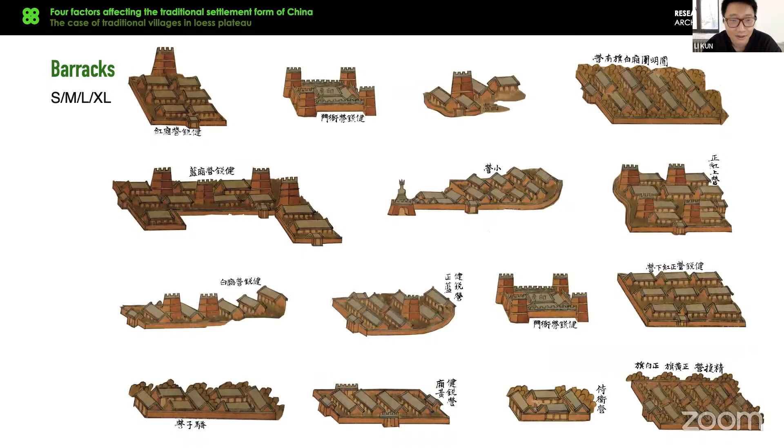And also the increase in scale is formed by the clustering of single buildings of the same size and courtyards of the same size. This is the villages - you can see one village, two villages, and also some big villages, and also some temples. So this painting reflects the Chinese understanding of architecture as a constant combination of types and archetypes, together with the barracks, offices and factories.

So if we see them together, we can see there are different functions. But just like Aldo Rossi said, when discussing the impressions of traditional Japanese architecture, which is also influenced by Chinese culture, it is difficult to tell the difference between the civil, the religious, and the community buildings of the past.

So when we link up the smallest functional buildings in that set of paintings, we see that they all look indistinguishable from each other - they look the same. It's a simplified version of what we can call the lower standard house, only missing two wing buildings in a standard courtyard. So all the different function buildings, they look the same.

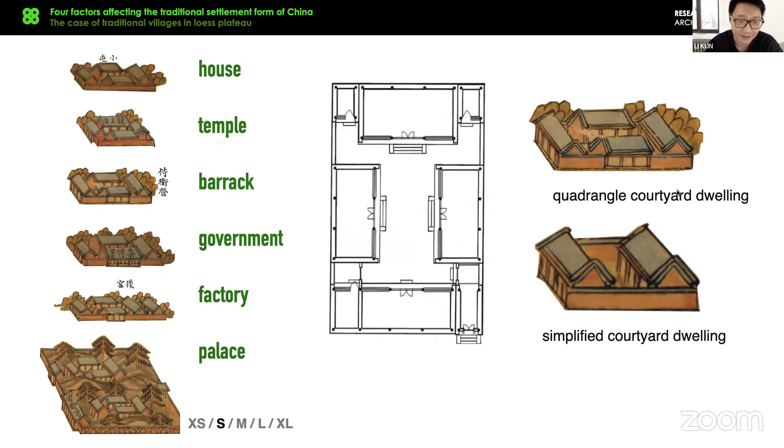And the layout is in the middle - they all look like a very standard design. So when many compounds of grouped courtyards gathered, settlements such as villages and cities were formed.

So going further, we can read how the ancient Chinese describe the city. As in European cities, the public and cultural buildings form critical infrastructure for the practice of the urban fabric and play a very important role in the urban form. When we see this Nolli map, there would be no urban order if the city consisted only of isolated buildings and monuments.

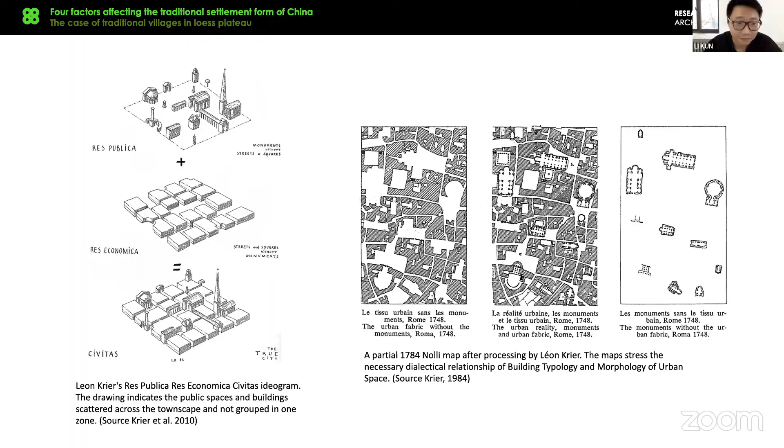This is why we focus our attention today on historical research and residential architecture study in China. The residential building and the organization of residential buildings is very important. In Chinese settlements, dwellings occupy a large amount of space, with similar dimensions, grouped together in very tight manners, with almost no gaps visible within the group. The result of their combination presents a very organic fabric.

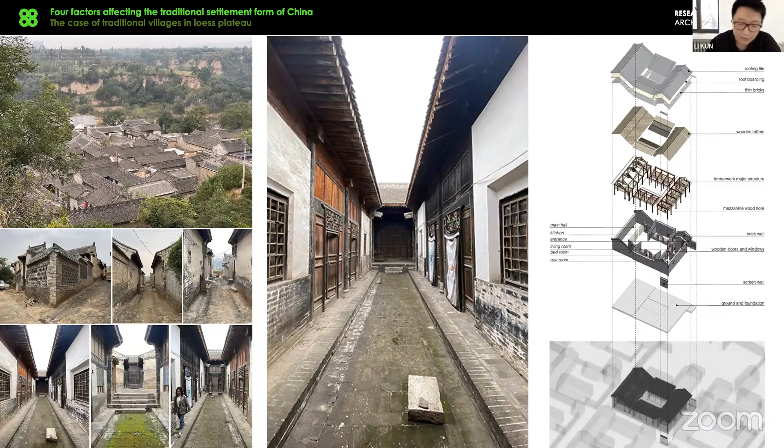This kind of single-story courtyard becomes a basic spatial pattern and ideal residential building form for much of the northern Chinese area during the traditional period. This is a very typical courtyard, in Chinese it's called yuan. The building in this image becomes the smallest unit in the traditional urban form and the smallest unit in the courtyard.

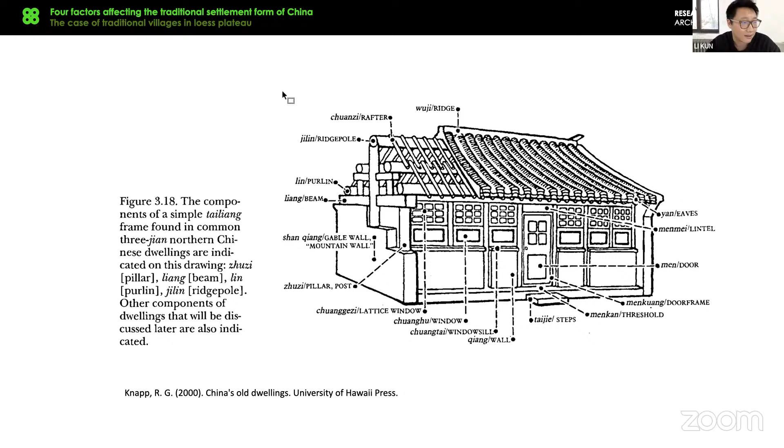It is realized through the timber self-supporting structure, where the walls themselves do not bear the weight of the roof. The main structure is these timbers, and the walls are only the enclosure. From this picture, we can see that the typical technical feature is that the structural beams and pillars are connected by mortise and tenon joints.

The scale of the building is also measured by the number of what we call room between two pillars. There is 1 room, 2 rooms, and 3 rooms. So 3 room or 1 room or 2 room is a measurement of the building in traditional China. We can also see there are some purlins on the roof, so 3 rooms and 5 purlins - this is how people describe this building.

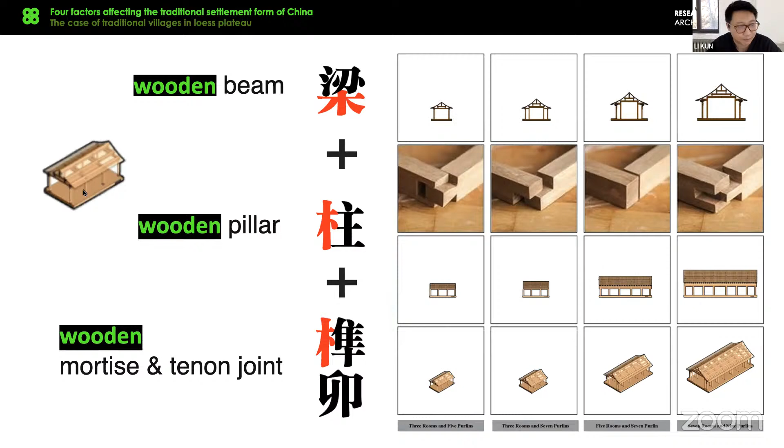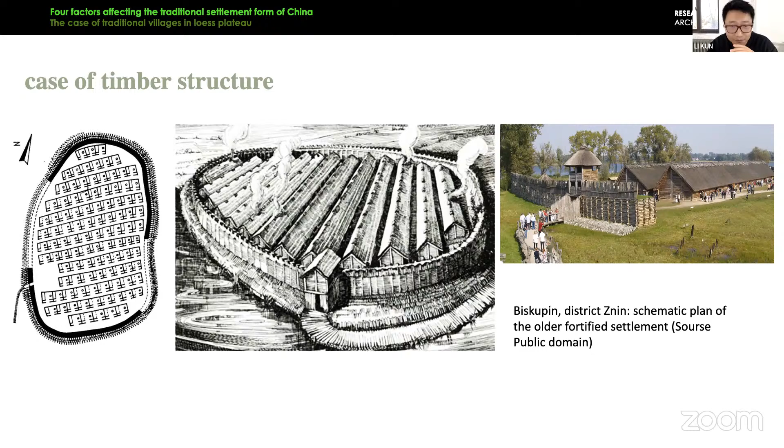Some questions are very easy to answer, because there are examples of wooden elements jointed by mortise and tenon elsewhere. For example, in the Iron Age settlements in Poland, in Biskupin and some other places, archaeologists have discovered a number of settlement ruins built of wood between, let's say, 760 BC. They were originally built in swamp environments, wetlands, and all the walls and buildings were constructed by timber. So the construction of houses with sloping roofs and such timber structures and materials were not only found in China, but also in Europe.

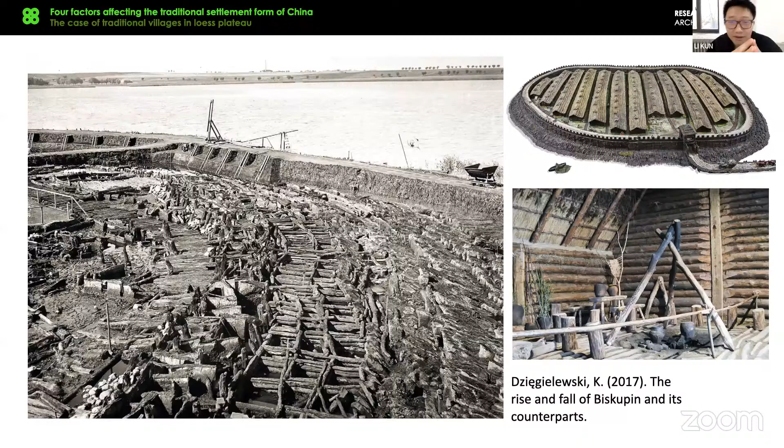There's another example that's easier to answer this question, in the Netherlands. The Netherlands is a country that has historically struggled with flood for a long time. As early as the 14th century, and even further back, most housing in the Netherlands was timber framed. This timber framed house can be defined as a self-supporting structure consisting of jointed frame members. It quite looks like the Chinese buildings, where even the wall does not support the roof. They have the self-supported timber structure system.

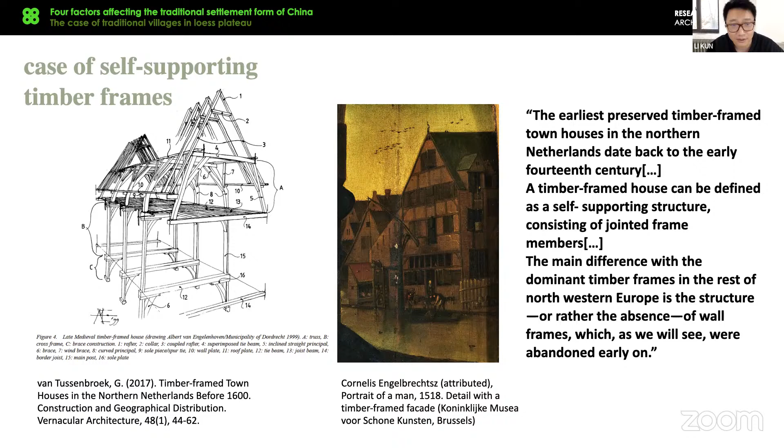So the wooden structure is not unique to China, and also the smaller dimension of the courtyards is not unique in China. There's a case of a house in Pompeii, Italy. Compared with this Silver Wedding house in Pompeii, you can see there's a typical courtyard in northern China which looks so much like it in scale. We found that the scale of their central courtyards are quite similar.

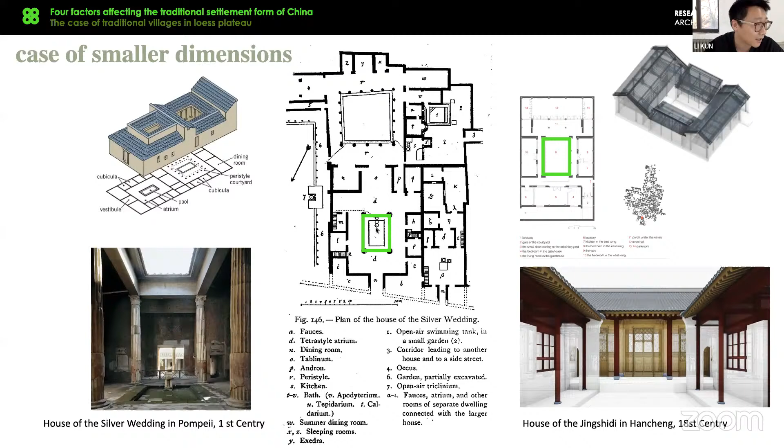In this part, the green one, because these two line up in the same scale. Also in China we have like two-connected and three-connected courtyards like this. So on this figure, it's easier to see the similarity in scale and form between these two types of courtyards between the west and east in the world.

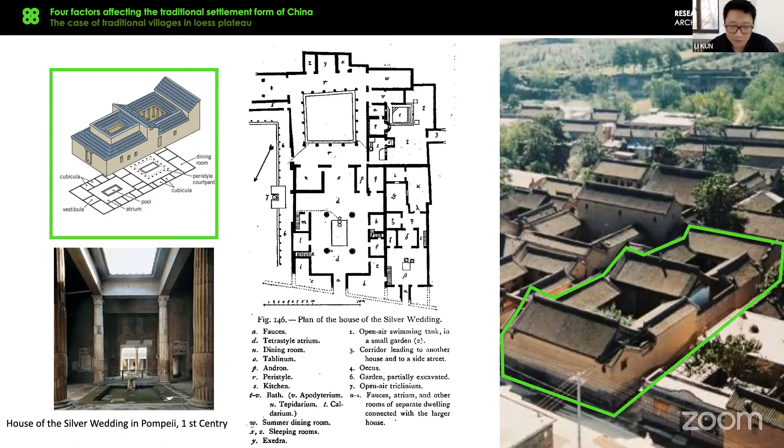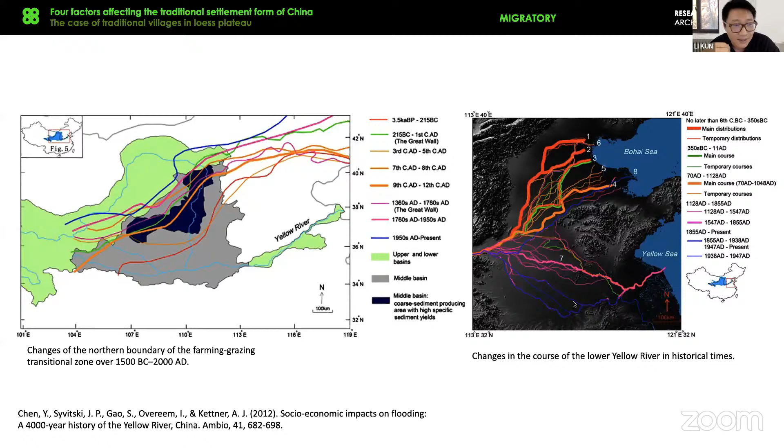And also in the past 3,500 years, the Yellow River changed its riverbed from the north to south and then went back to the north. So every 25 years, there's a very big change of the riverbed. And also, maybe every 2 years, there is very big flooding in the surrounding areas of the Yellow River Basin. So that is a very bad situation for the ancient Chinese people.

So that's why the very important American Chinese historian Ray Huang pointed out in a book named China, a Macro History, that floods and water flooding greatly influenced the formation and development of Chinese society. The Yellow River often has an unsettled riverbed, causing flooding and breaking of the embankment, and the possibility of massive loss of life and property of the ancient people. So how to face this flooding, how to face this situation, how to change the lifestyle is a very important question for the ancient Chinese people.

So also, if we look at some historical books in ancient China, you can see that there's one word. It said that in ancient times, the former kings did not have places permanently. In winter, they lived in souterrains. They lived maybe in a cave, underground or on the ground. And in summer, they lived in elevated places. Maybe they lived in some houses on the tree or in high places. So it means that in winter and in summer, they change their places to live.

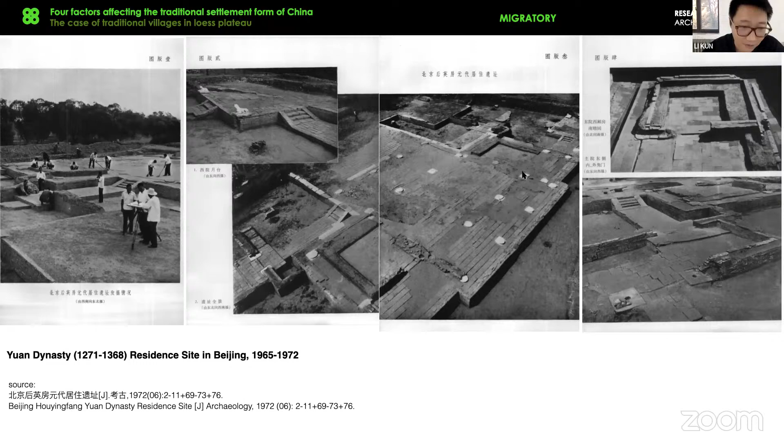So why did they disappear? Maybe one reason is that people demolished them and built some new buildings on the basement because the wood cannot last so much time. And also maybe when people moved to other places, they took these materials with them, these pillars, these big beams, the tiles, and maybe they transported them on the water, because the wood can float like a boat and move from one place to another very easily.

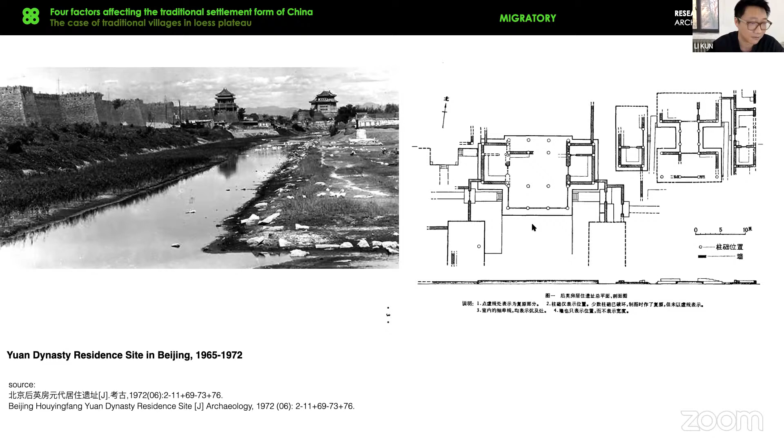So this is the layout of the courtyard basement in the Yuan Dynasty. We can see them like in a belt because this is the basement of the city wall. Okay, so this picture is a very interesting picture. I want to show the idea that when the flooding is coming, or when there are some very damaging changes of the environment, people can move their buildings: first make the buildings into small elements, and then take these small elements to another place.

And there's also an interesting thing: in ancient China, when we found some documents, we see that the yin and yang attributes of the residential building changed when they moved from one place to another. So this also tells us maybe in ancient times, migration was very, very common. It's a popular thing people did to face the situation, because when they move to another place, their nature is also changed. Okay.

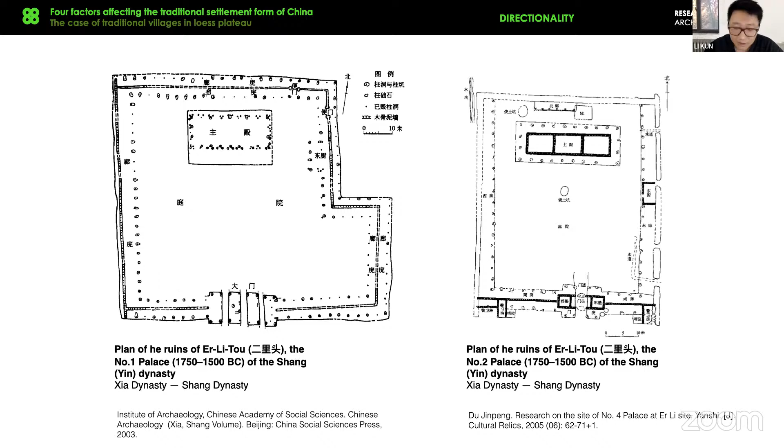So they have a strong feature that the courtyard faces the south. But for ordinary people, are their houses all facing the south? That is also a question. So also we can see the numbers of different orientations have some relationship with the height of the building.

For example, in this courtyard, the north building, whose roof height ends in the number 1 or 6. For example, this is 1.16 unit, and this is the number of the north.

It also works on the south building, the west building, and east building in the courtyard. So this is what I found in the investigation in the village, and people said this is their tradition. This is really a tradition. So this tradition formed the building form and the village morphology.

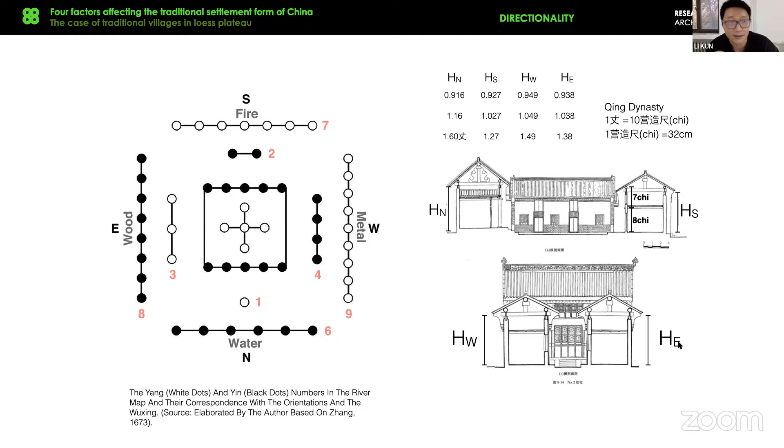Okay. So also there are two floors of this building, and the first floor and second floor, their height is different. The first floor has 8 units, and the second floor has 7 units. And this is also a tradition. So this 8 not only means a number, it also means the element of wood, and 7 means fire. And we know that in Chinese culture, the five elements have some relationship with each other. Sometimes they say fire grows from wood. So maybe there is some interesting connection with this kind of culture.

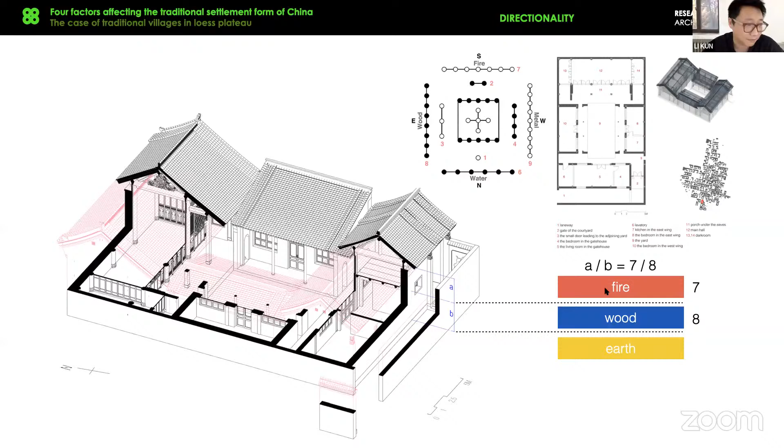So let's answer another question: in villages, do these courtyards all face to the south, like this conceptual layout? If like this, every family can face to the south. But the reality is that not all the courtyards face to the south. Some face to the north, some face to the east, some face to the west. And if we combine the areas with each other, we found that in this layout they save more land. They can save more cultivated land.

And in this way, the wind can go from one place to another and make a better environment for ventilation. And in this other way, the wind goes very fast, and maybe there's a shortcut for the wind, and the new air is quite hard to get inside the courtyards. So this is also a concern of the layout.

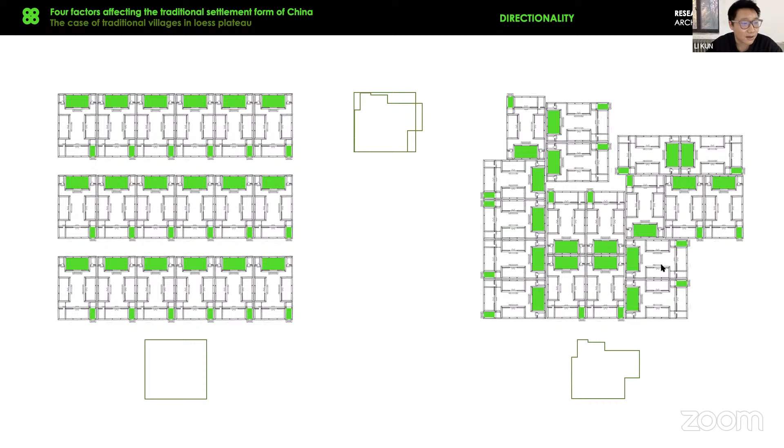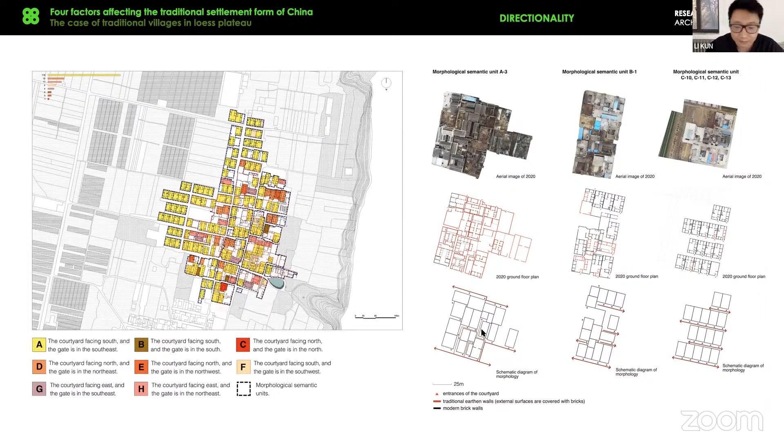And we can also see this kind of layout, but this kind of layout was built after the 1990s or 2000s, because in this time they destroyed the traditional culture, and they did not use traditional culture to build new houses and plan new residential areas. But in the true traditional area, it's different. And it's not only in one village; other villages are in the same situation.

And for the orientation, another very interesting thing is that when we did some investigation along the Yellow River, we could see that the main axes of these villages all seem to face a mountain peak. These axes are not at a similar angle. They are different. But they face the mountain peak. So I was interested in that. I asked the villagers, why does your road face this peak? He told me they have no idea. They don't know why.

But an interesting thing is that he told me, when they stand on the road, they see the peak. Their older generation told them that when you see some clouds on the peak, it means that in not more than one hour, there will be very heavy rain here. So it tells people the future climate.

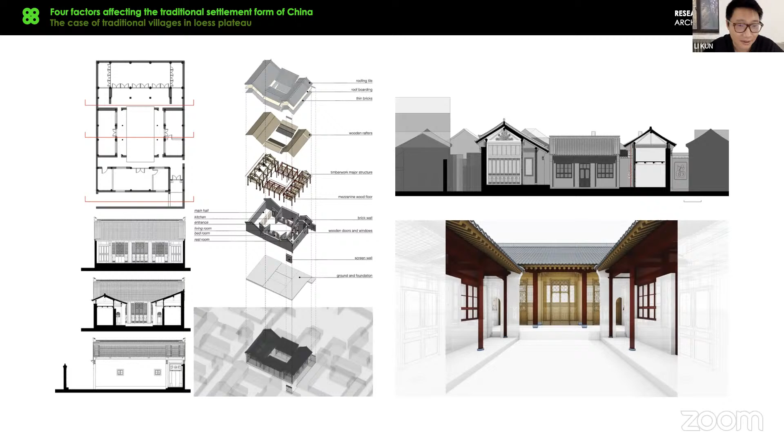I think that ancient Chinese people were very smart. They have a kind of system to organize the layout of the village, and they tell people that there is some feng shui theory about what location or which direction for a house or for a courtyard is good. It does not depend on whether it faces south or north. It depends on the host, the people's birthday.

And different people have different nature. And based on their birthday, you can get a good orientation for you and your family for your courtyard. So this is a very complex system, but it's very useful, in that people do not want only their courtyard to face the south, because maybe for his birthday, it's better to live in a courtyard oriented to the east.

So he wants to live in this place, because if he lives in this kind of courtyard, it means that maybe in future his family will be healthy, he will be richer, he will get more income, like this. So in this picture, we show different layouts. This is just some examples, not all. These are some different layouts of the courtyard.

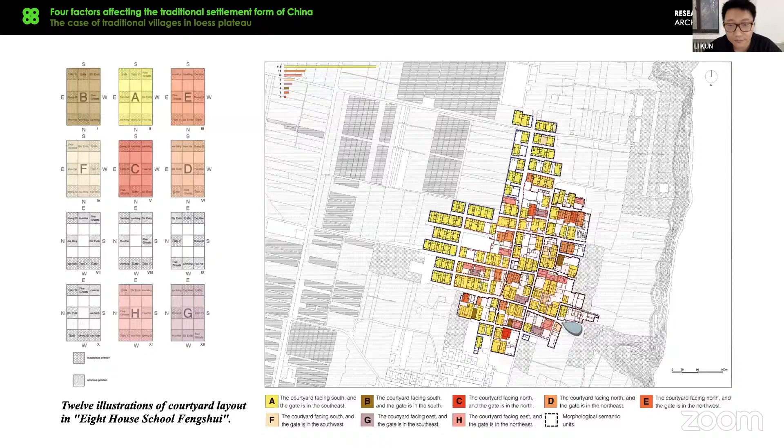Okay. So this is some ancient painting. You can have a look. And also this is the layout of the courtyard.

Sorry, Li Kun, we've got 3 minutes. You should. Okay. So I can speak faster.

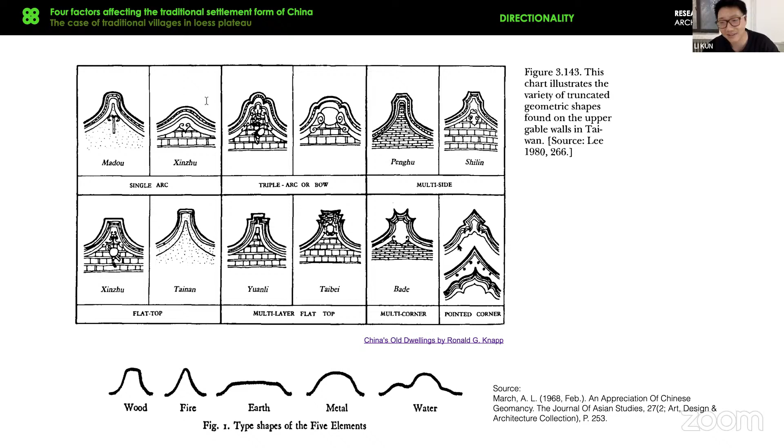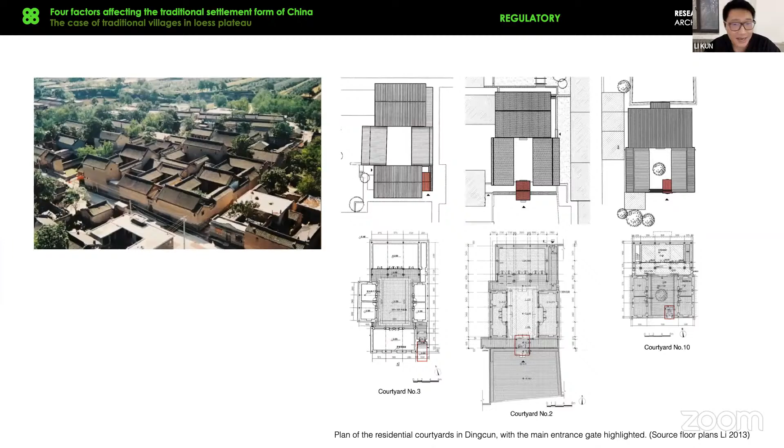So the key words here, I think, are that the 4 factors which we found, which influence the layout, the urban form or the village form in China, have the same basis, which we call the philosophy of change. And we can also find this philosophy in the Book of Changes. It's a very famous Chinese philosophy book.

So because of the change of the environment, because of the change of the orientation, because of the change of people's birthday, anyway, all the changes give the Chinese settlements or urban form a very interesting feature, which is that the authenticity of the Chinese settlements' form and morphologies is just change. So this is what I want to introduce today.